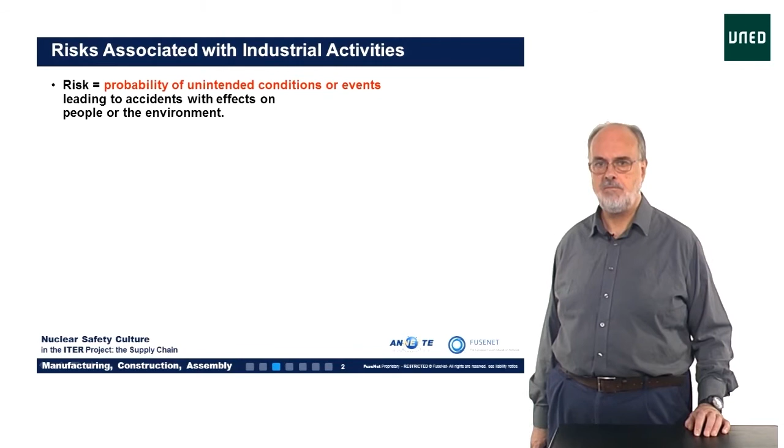When we talk about the risks of industrial activities, we mean that there is always a certain probability that conditions or events may show up which lead to accidents. Of course, these conditions or events are almost always unintended, but the resulting accidents may injure people or damage the environment. As an extreme example, this photo shows the explosion of a chemical plant in Nevada, USA in 1988.

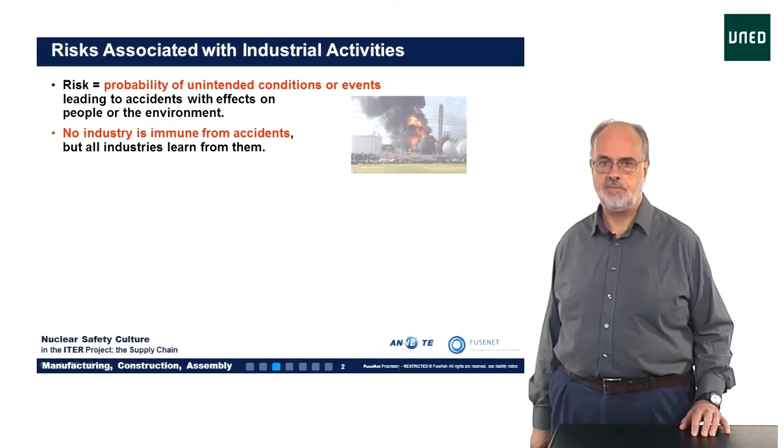We know that no industry is immune from accidents, and the effects are, of course, very different, but in general, all industries learn from them. Let's take an example, namely the civil aviation. Here, accidents happen every year, and each one is meticulously analysed.

As a result, the lessons learned from the experience of nearly 1 century of flight mean that today, reputable airlines are extremely safe. And in other industries, like the chemical industry or the oil and gas industry, major accidents have led to improved safety in their plants today.

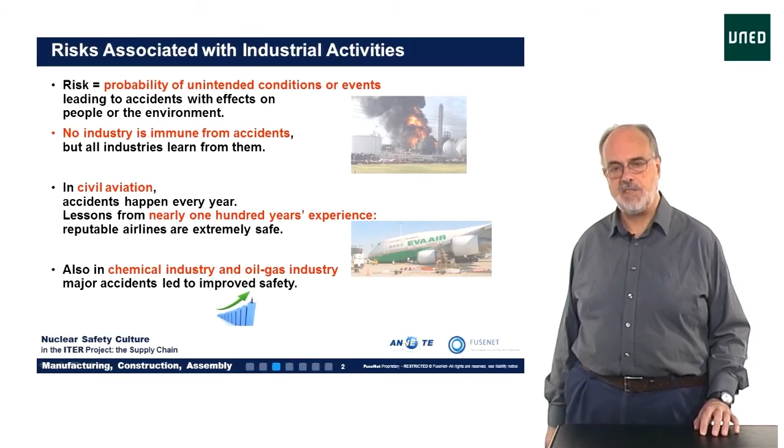So now let's focus on nuclear. In connection with nuclear, we mainly talk about energy production. Here you see a photo of the Belgian nuclear power plant in Tihange. Or in connection with nuclear, we also talk about medical applications, for example, X-raying people, either for imaging or for therapy in the case of cancer.

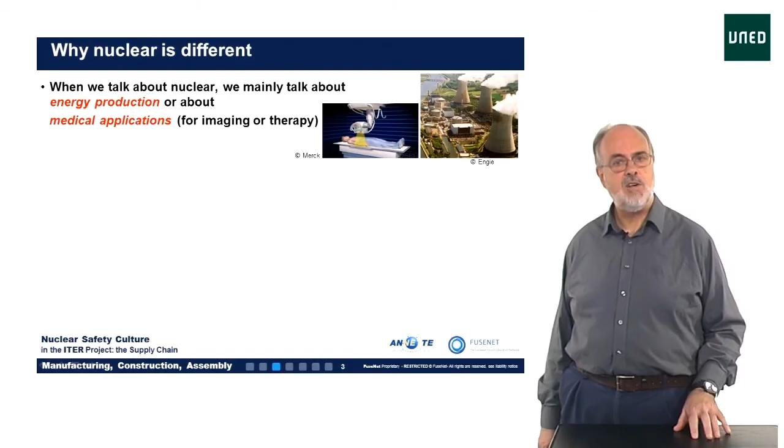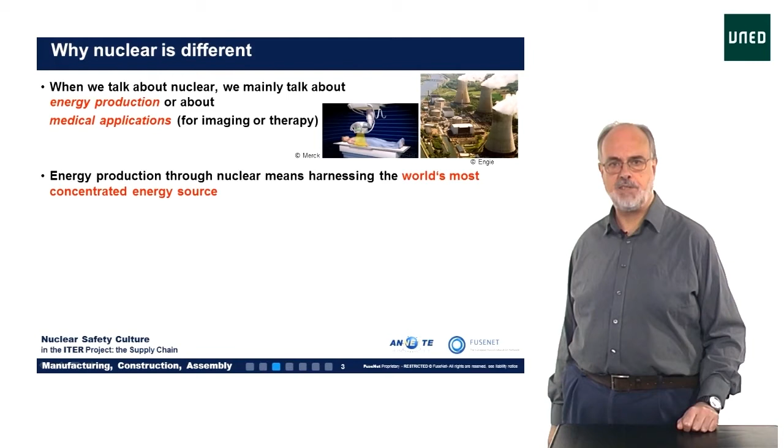In the case of energy production, the world's most concentrated energy source, contained in uranium, is used to produce electrical energy through the fission of uranium nuclei. However, part of the energy is released and transmitted as radiation. The photo shows an example where the radiation leads to the bluish glow of the water in a fuel pool.

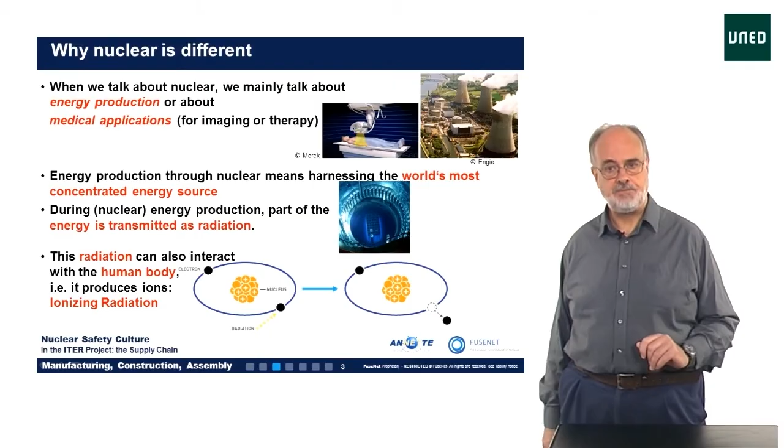What's important for us is that this radiation can also interact with the human body. When encountering human tissue, it may produce ions. This so-called ionization is an effect in which radiation may kick out an electron from the outer shell of an atom so that the atom becomes positively charged. That's to say, it becomes an ion. That's why the radiation is called ionizing radiation.

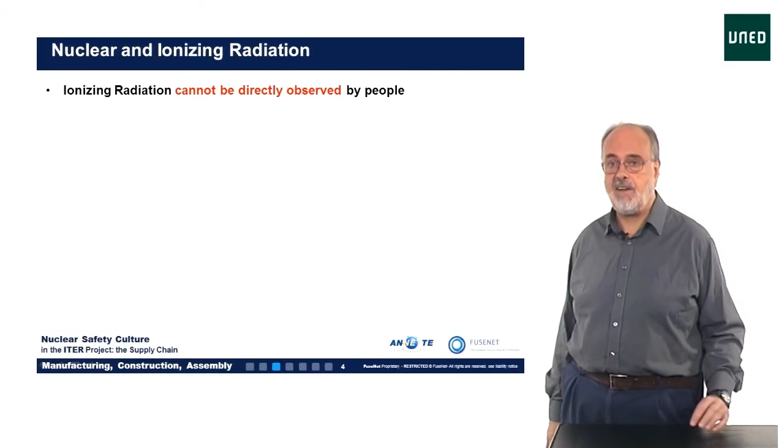An important feature of ionizing radiation is that it cannot be directly observed by people. This means you can't hear it, see it, or feel it directly, only detect it with special instruments. The effect on the human body is that ionizing radiation may damage cells. However, the body itself nearly always repairs damaged cells properly.

The eventual effect on the health of people will depend, of course, on the amount of energy transmitted by the ionizing radiation. However, if people are properly protected, this energy is low, so it may not lead to any observable health effect. For example, you may remember the protective measures used when you've been X-rayed for medical diagnoses.

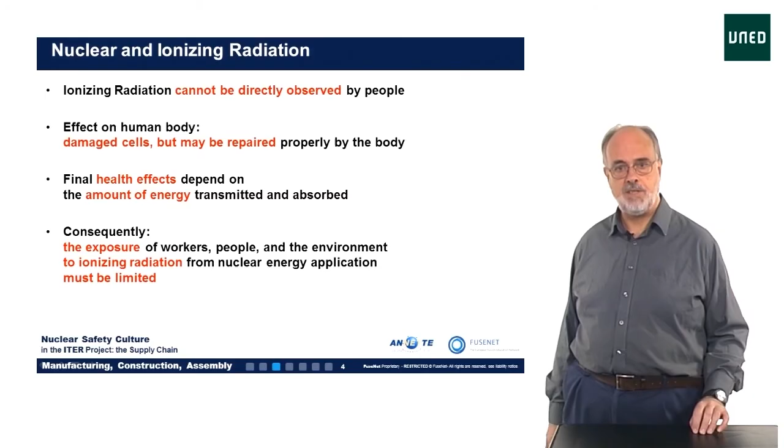We can conclude that when nuclear energy is applied in industrial activities, appropriate measures must be undertaken to limit the exposure of workers, people, and the environment to ionizing radiation. During the later stages of ITER operation, nuclear energy will be released, so it will be necessary here too to undertake appropriate measures to limit the exposure to ionizing radiation.

Therefore, in ITER, suitable safety equipment must be installed to perform important safety functions during the nuclear operation of ITER. Although the nuclear operation of ITER will be started only far in the future, it's very important for you to realise that even now, the basis for the safety equipment and the related safety functions must be laid already.

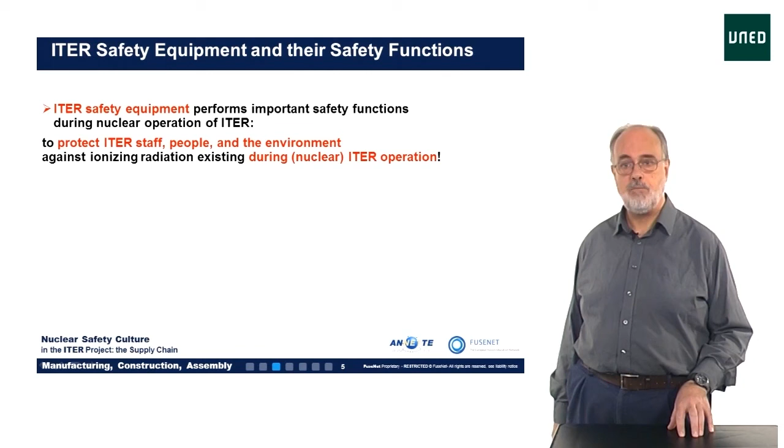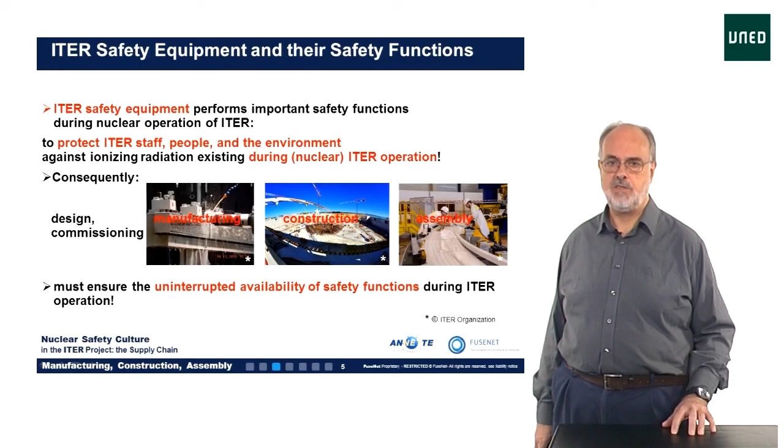At present in ITER, the safety equipment will be manufactured, constructed and assembled. And these activities are mainly those that you are engaged in. So already, with your current activities, you will influence considerably whether the ITER safety functions will be available with no interruptions during its nuclear operation.